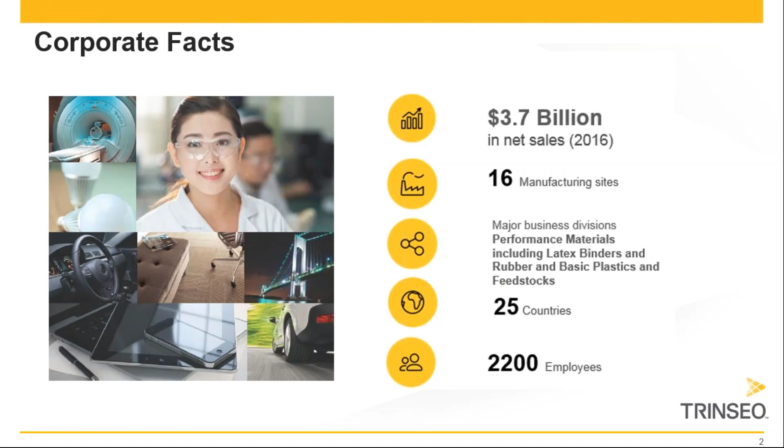We produce different plastics, which I'll discuss briefly on the following slide. We have 16 manufacturing sites, we are in 25 countries, and we have 2,200 employees.

Next slide, please. We are vertically integrated with some of the feedstocks that we use to produce our plastics. And we are also a compounder that provides custom solutions to meet specific customer requirements.

Today, as I mentioned, we're going to talk about ABS, a material Trinseo has been producing for over four decades now. We use a proprietary technology for our ABS, which is a continuous polymerization process. We produce ABS in the US, Europe, and China. China is our newest location, where we began production during the second half of last year.

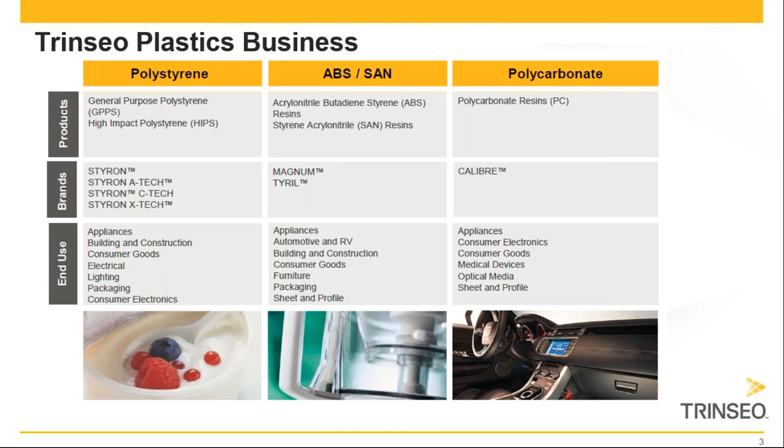Next slide. I want to move into the main part of our presentation and introduce our presenter, Mark Vreys. Mark is our resident expert on ABS resins, and he's based in Terneuzen, Holland.

Today, he's going to share the two methods of producing ABS, the more common emulsion method and the alternative mass polymerization process, comparing the two and discussing the benefits and applications of each. ABS, as you might know, is a very versatile material found in a variety of applications, including the furniture industry, the transportation industry, recreational vehicles, health and fitness equipment, kitchen and bath, and signage.

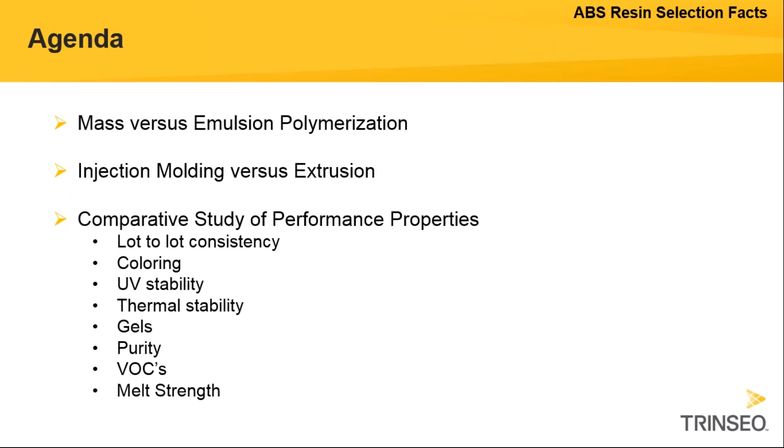So let's first start with the polymerization process, and I'll first highlight the proprietary mass polymerization process of Trinseo, which is also named the solution polymerization process. In this process, we start with a mixture of polybutadiene rubber, styrene monomer, and acrylonitrile, which are all brought together and mixed into a solvent.

The final step is then the removal of the residual monomers and the solvent in the so-called devolatilizer. Then we move the ABS polymer stream into the finishing section, the pelletizer, resulting in Magnum ABS granules. Magnum is Trinseo's brand for mass ABS.

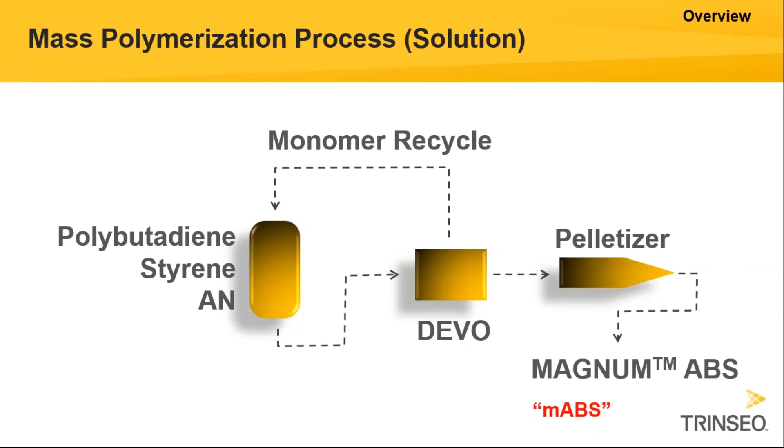So a broader portfolio of products is possible, but it typically has a lower purity due to the presence of the emulsifiers.

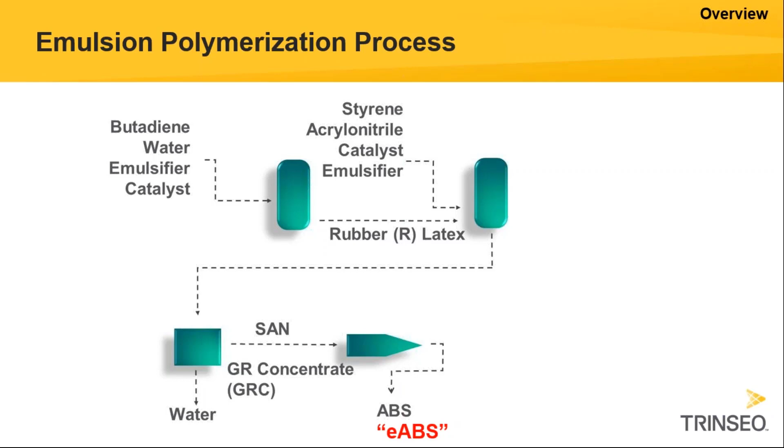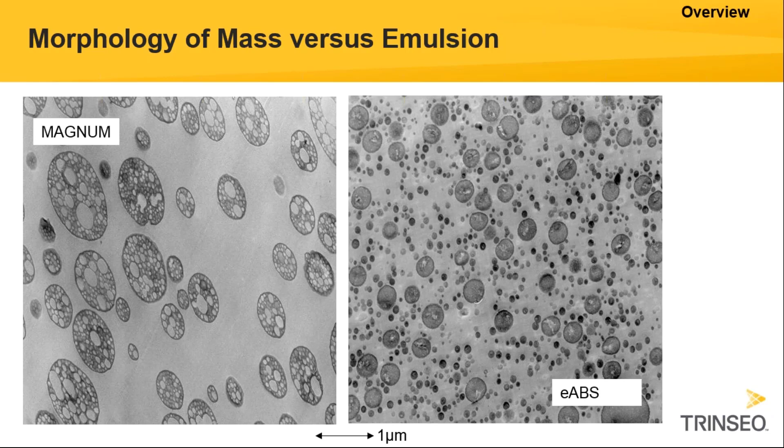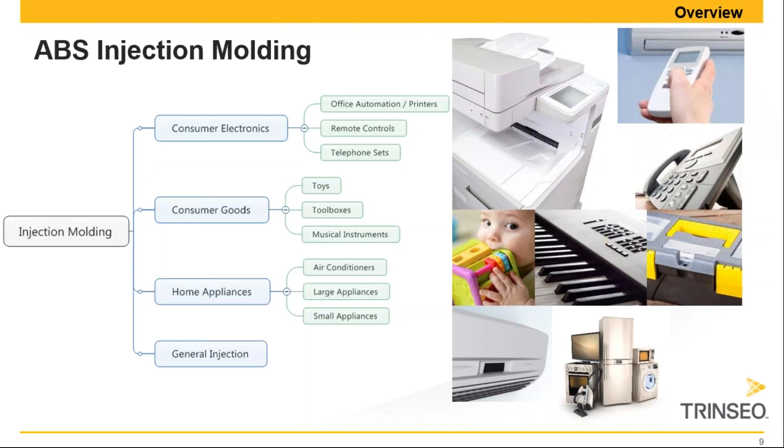Injection molding is all about many colors. So a high lot-to-lot consistency, an easy and efficient self-coloring, are clearly wanted attributes, as of course is also high gloss and good gloss retention after UV exposure, and addition color stability after UV exposure.

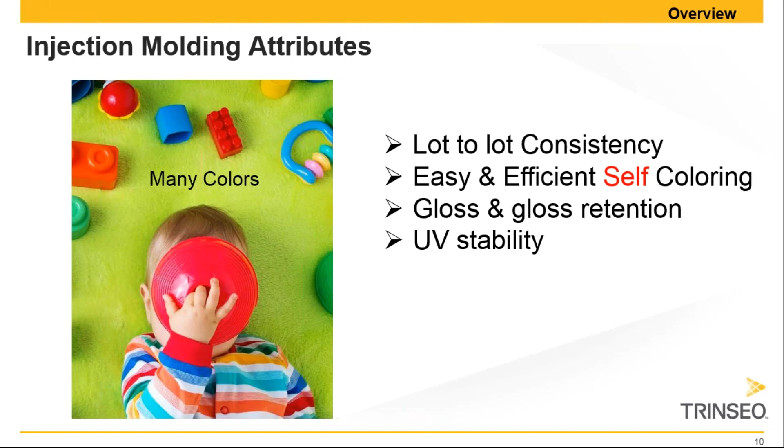Second process is ABS extrusion. Let's have a quick look on the applications here. Now, in ABS extrusion, you have two segments. You have sheet extrusions and you have edge bands and profiles. And the main difference is basically the width. Sheets are wide, edge bands and profiles, those are narrow.

And in the sheets, you have several applications downstream. Most of the time we talk about ABS PMMA co-extruded films for furniture applications, or ABS PMMA co-extruded sheets for vehicle exterior, like the tractor example, the engine hood, the rooftop, the wheel arches. In transportation, interior panels can be made from ABS extruded sheet. Automotive interior parts, we see here also roof boxes for automotive.

Of course, ABS PMMA is very popular in sanitary equipment, also somewhat in the advertisement industry. Travel, we see luggage cases, and also the use for doors, inner doors, and sometimes also outer doors. Edge bands and profiles, they go of course into the edge bands for furniture applications, and we also see profiles in white goods for large appliances.

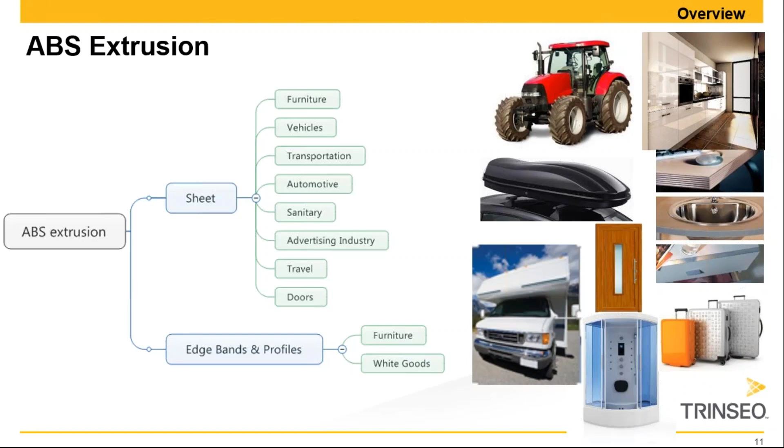Now, before I move into the attributes for ABS extrusion, I want to have a quick word about the channel to market, because there is some extra complexity in the channel to market compared to injection molding.

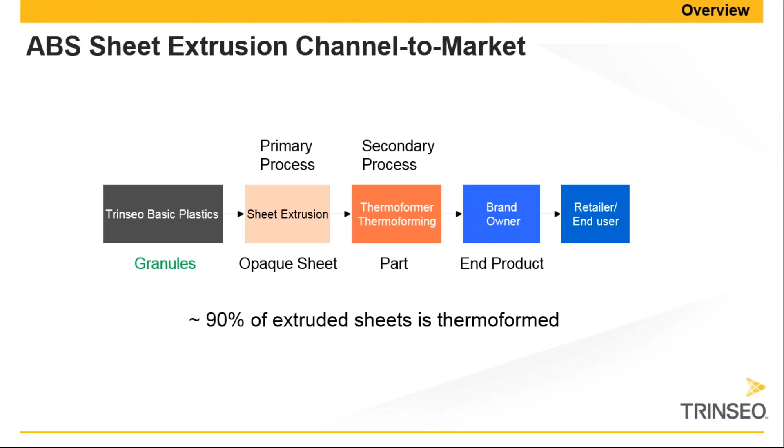About 90% of extruded sheets are being thermoformed. So the primary process in this channel to market is sheet extrusion. The sheet extruder sends the sheets to a thermoformer, where the secondary plastics process happens, and the extruded sheet is formed into a part. The thermoformer sends that part to the brand owner, who assembles it into the end product. From there it goes either directly to the end user or mostly through a retailer to the end users.

If we focus on the primary process first, sheet extrusion, there are many important attributes. Both sheets and edge bands are offered in a very wide range of colors. Hence, easy and efficient self-coloring are important attributes of the ABS. Good lot-to-lot consistency will avoid color dosing corrections, and will enhance productivity and reduce scrap.

In extrusion, there is side trim, and clean scrap is typically reused and reground back into the core layer of the sheet. Therefore, very good thermal stability with retention of color and properties is an important attribute. Good color retention upon UV exposure is relevant as well. ABS resins that are pure and low in volatile organic compounds will avoid unpleasant smell during extrusion, and will reduce odor at consumer level, which is of particular importance for vehicle interiors.

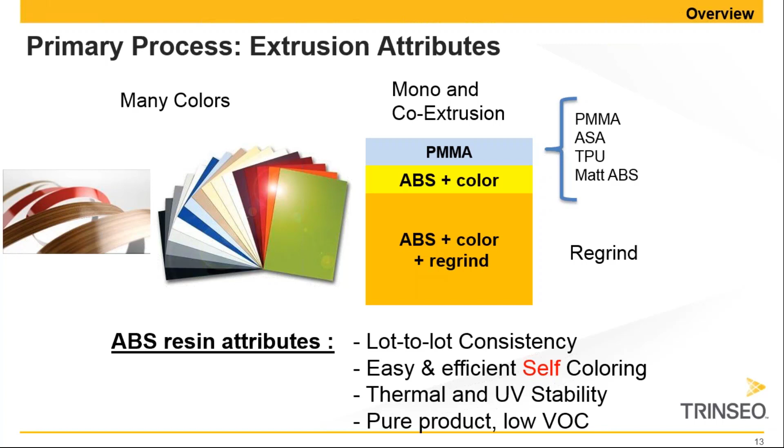If we look now shortly into the secondary process—remember, there is first extrusion and then secondary thermoforming—there are some specific ABS resin attributes that are important for thermoforming.

It's of major importance that the surface quality of thermoformed parts is very nice. There should be a complete absence of surface defects. So it is very important for the ABS that the unmelts, the so-called gels in the ABS resin, are as low as possible.

In thermoforming, we often talk about large, fairly complex parts with a high draw ratio, which may result in wall thinning. A higher molecular weight ABS will offer higher melt strength, and higher melt strength will give better thermoformability and better wall thickness distribution of your final part.

Obviously, like in ABS sheet extrusion, UV stability is relevant, and a pure product with low levels of volatile organic compounds would be beneficial for interior type applications.

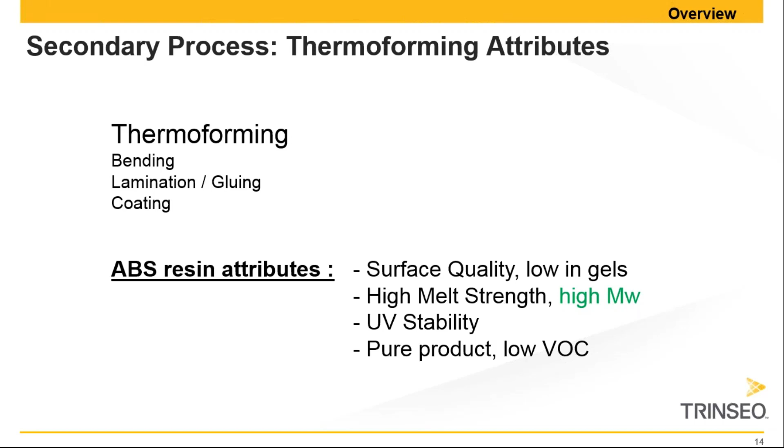Now we will move into the comparative study. Most of the comparative measurements I will show will be the Magnum 3904 directly in comparison with a high impact emulsion ABS of similar impact performance and similar melt flow rate. In the graphs, when I refer to Magnum, I mean Magnum 3904. If I refer to EABS, I mean the high impact emulsion ABS.

Now let's move into the attributes and compare them one by one: the mass ABS process of Trinseo versus the emulsion ABS process.

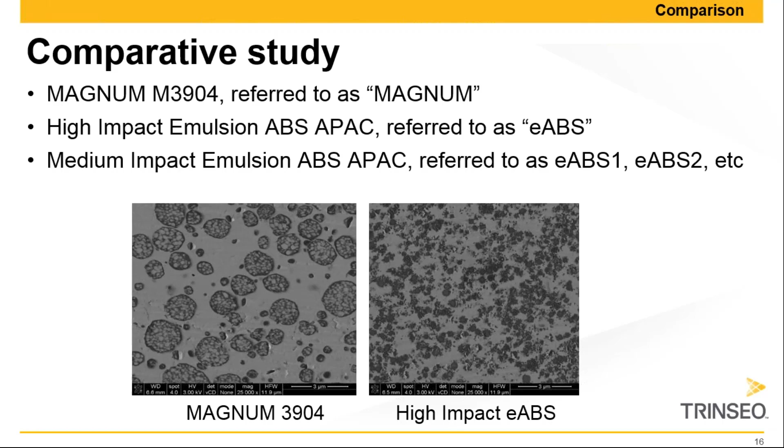First attribute is the lot-to-lot consistency. The run sizes of Trinseo's process are quite big, 400 to 1200 metric tons, typically a factor 10 bigger in run size than typical EABS batch type processes.

This will inherently lead to a very high shipment-to-shipment consistency, as a series of shipments often will originate from the same run. So in between these shipments, a customer will not have to do any color master batch adjustments, and that will reduce his risk for scrap.

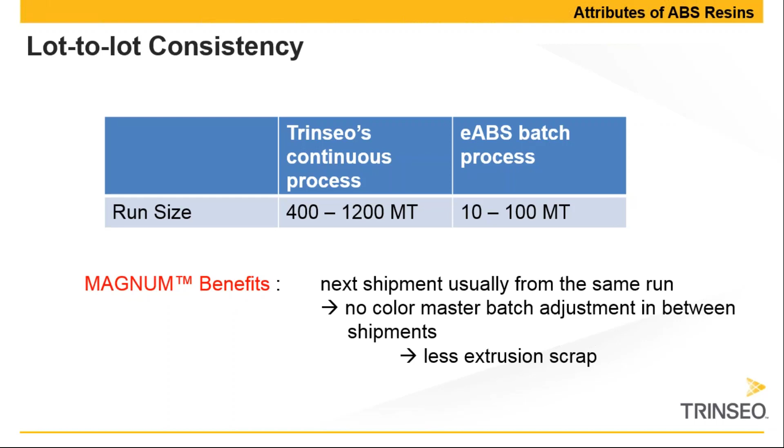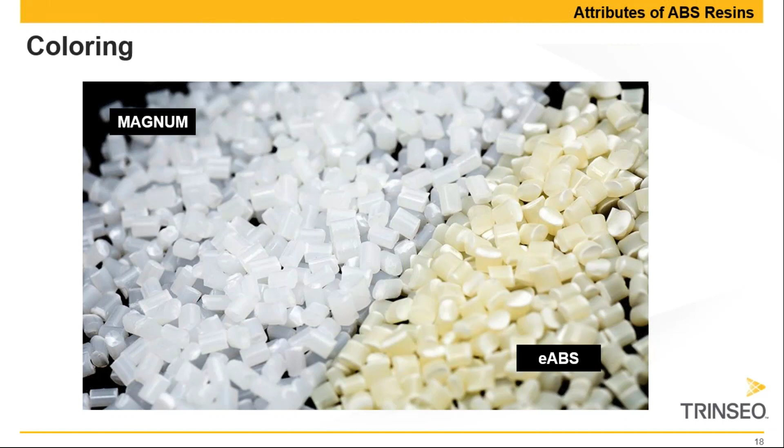Thanks to the lower base color, it is easier for Magnum to color it into lighter colors. On this graph, I represent the color as a B star value on the vertical axis, and the higher the B star value, the more yellow the appearance is.

What we've done here is we added 4% of a white master batch to Magnum and also to the Emulsion ABS, and that white master batch contained 50% titanium dioxide. At the same white master batch dosing levels, you can see that the Emulsion ABS is 2.5 units higher in B star value, so clearly more yellow.

It needs up to a factor 3 more white master batch dosing to bring the Emulsion ABS to the level of Magnum.

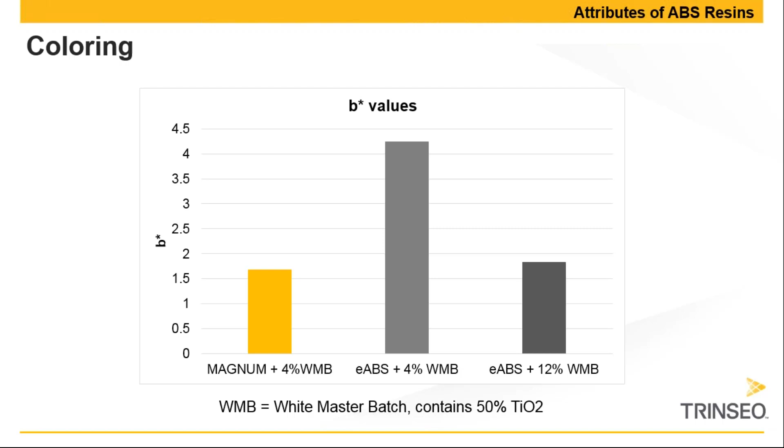This graph shows a similar picture, but now I've added two experiments. We added a fixed amount of optical brightener. With an optical brightener, you can give your sample a brighter and lighter appearance.

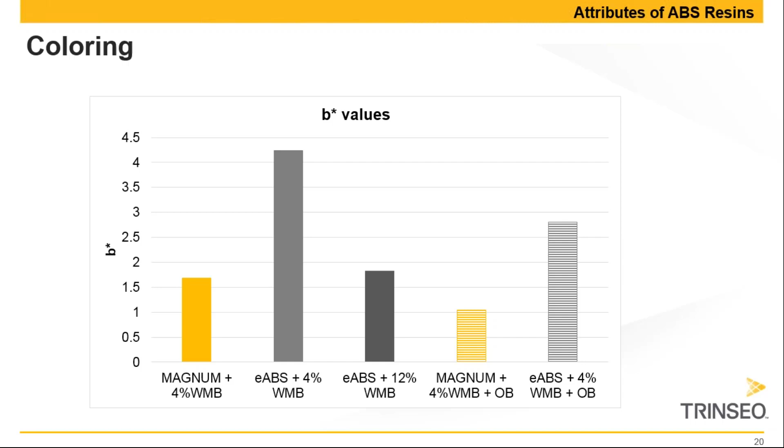But even with adding an optical brightener, the message is the same. It is even so that the Emulsion ABS with 4% master batch with optical brightener still has a higher B star value than the Magnum with 4% master batch without optical brightener.

Now this will have a direct impact on the cost to make final parts. If I assume a cost for titanium dioxide of almost $3 a kilogram, then if I move from 4% master batch to 12% master batch to get to the same final color, Emulsion versus Magnum ABS, we are looking at over $100 extra cost for coloring for the Emulsion ABS.

Now, the extra dollars is not the only disadvantage. There is also some loss in physical properties, as you can see in the second column of the table, where we did some falling dart impact tests, and you see there is a 15% reduction in total energy measurement. So there is some loss in impact due to the addition of extra coloring master batch.

Also, as titanium dioxide is a kind of mineral, your density will go up as well, and it's not negligible. It's about 9%. If you're looking at weight savings, then 9% is for sure not negligible.

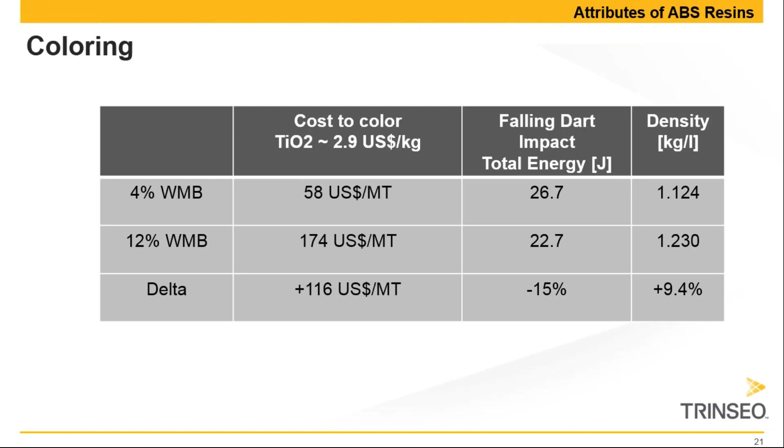There is another risk in using high amounts of master batch, and that is risk for surface defects. The picture on the left side is an electronic microscopy picture of a cross-section of a sheet right through a surface defect. You see this wave at the upper side of the picture.

That is in fact the surface of the sheet, and the surface showed a local deformation due to an inclusion. When we analyze this inclusion with elemental analysis, which you see on the graph on the right side, you see a major peak of titanium, and in the middle and on the left side there is oxygen. So clearly you can say this is very likely a titanium dioxide agglomerate due to the too high usage of pigment dosing.

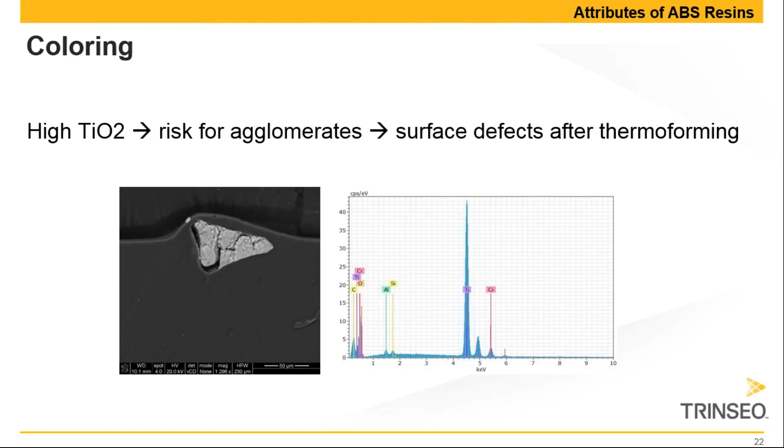Now we move into another attribute for the ABS: we move into UV stability.

This also has some impact on cost. If I take a standard UV absorber for ABS, which is around $30 a kilogram, and about 0.3% level into Magnum ABS is sufficient for indoor applications, then it means a savings cost for Magnum ABS of about $80 a ton for the final part.

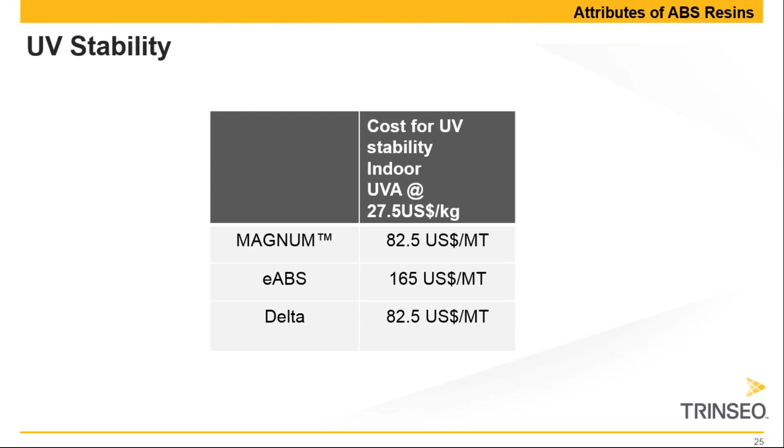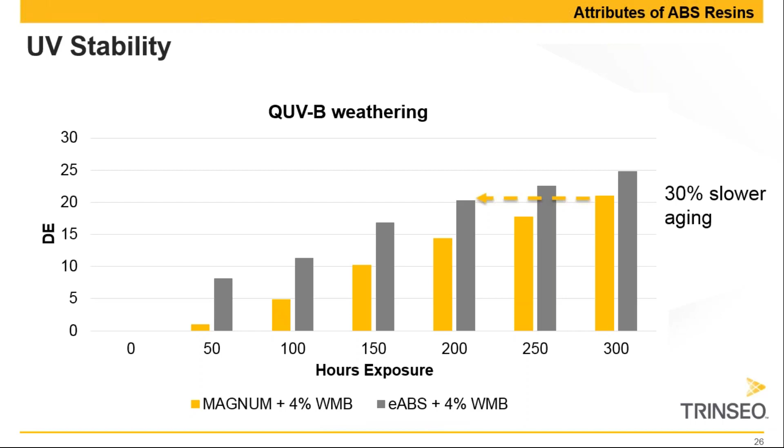Now, for outdoor parts based on extrusion thermoforming applications, it is more cost effective to put the UV absorber into a cap layer, for instance a cap layer of PMMA, or to use ASA as a cap layer to protect the ABS.

Remember, to make the rubber particles visible in electron microscopy, we use a pre-treatment process called the staining process. The staining process acts on the double bonds present in the rubber. Because of UV exposure, these double bonds are gone. The high energy of the UV light starts to cross-link the rubber and destroys and consumes all the double bonds, so the staining process cannot happen anymore. That's why the rubber particles are not visible anymore, but they're still there.

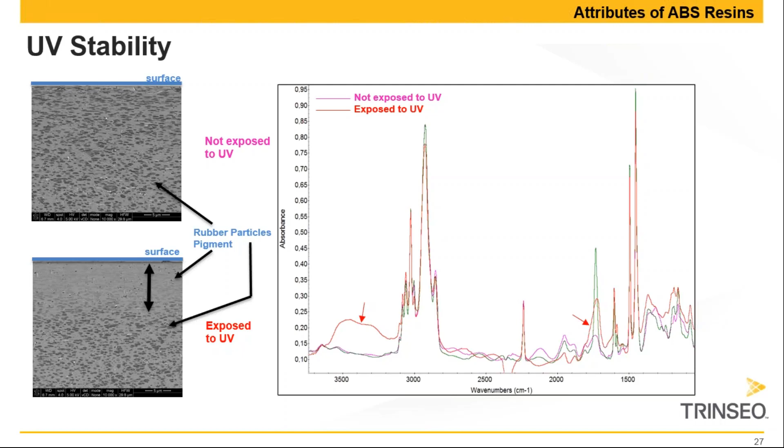Now let's move to the next attribute, and that is thermal stability. Thermal stability is an important attribute for injection molding and extrusion, especially for extrusion, because there are also always significant amounts of regrind that are reused during the extrusion of the sheet.

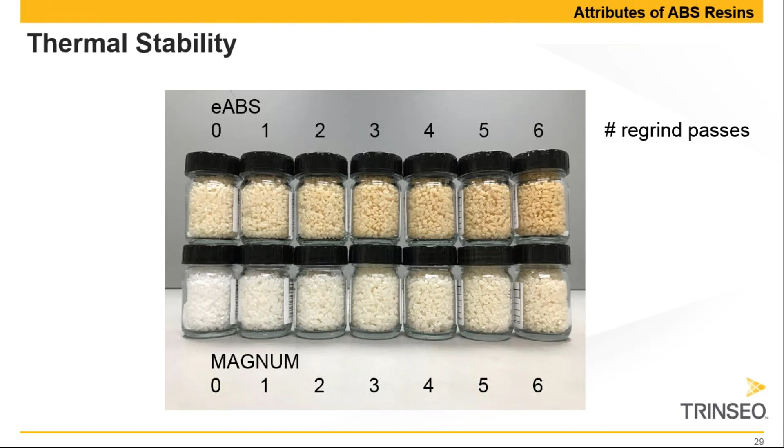Hence, Magnum is more suitable for high regrind loadings or higher regrind loadings compared to emulsion ABS, which will require more color corrections and of course then more cost for pigment.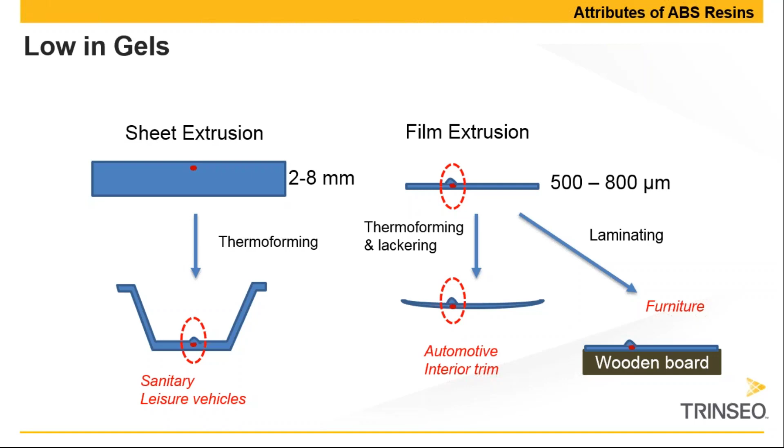We have the very small ones, the small ones, the medium ones, and the large ones. For each of these categories, the software computes the number of gels that we have per square meter of film, which we then can calculate back per kilo of resin. Obviously, the medium size and large size gel categories are the most critical for extrusion thermoforming applications.

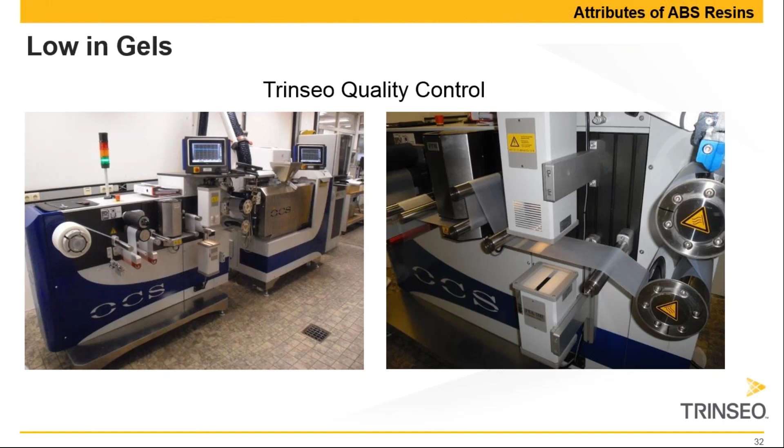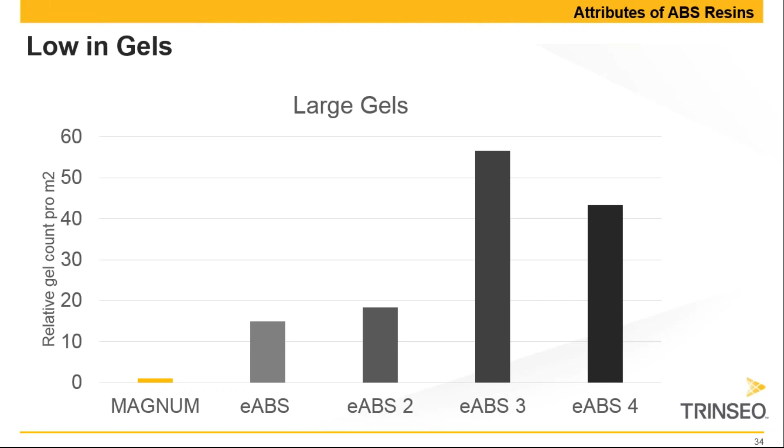Now, a DSC experiment is not a fine experiment, it's pretty brutal. So you would need already close to 1% of an impurity before it would be visible in a DSC. So in this case, we can roughly say there is 3% of non-ABS product in this emulsion ABS. And you would prefer your ABS as pure as possible.

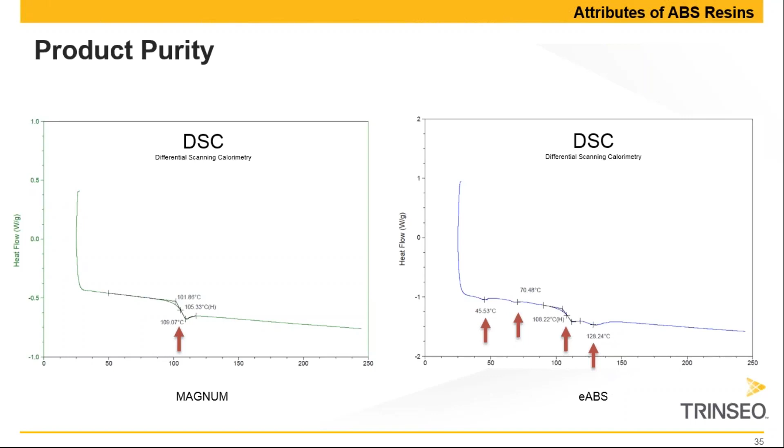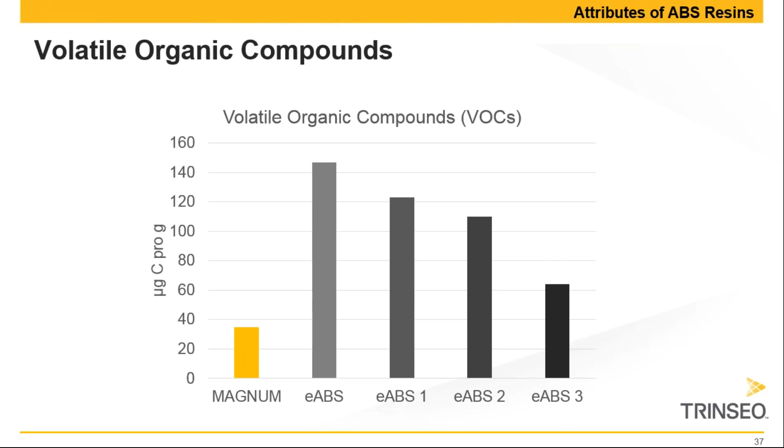We start from a rectangular test specimen that we heat to a temperature of 155 degrees, and then we pull this test specimen with a force at a fixed rate. We continue pulling, and at a certain moment the specimen will start to show necking, and finally it will break. The force at which it breaks, we call the melt strength.

There it's first blown or sucked into the bubble prior to the actual vacuum forming step. And when the sheet is blown or sucked into the bubble, it is obvious that necking will happen in the wall of the bubble, and the necking in the side wall, the circular side wall of the bubble, will be higher than on the top or the back of the bubble.

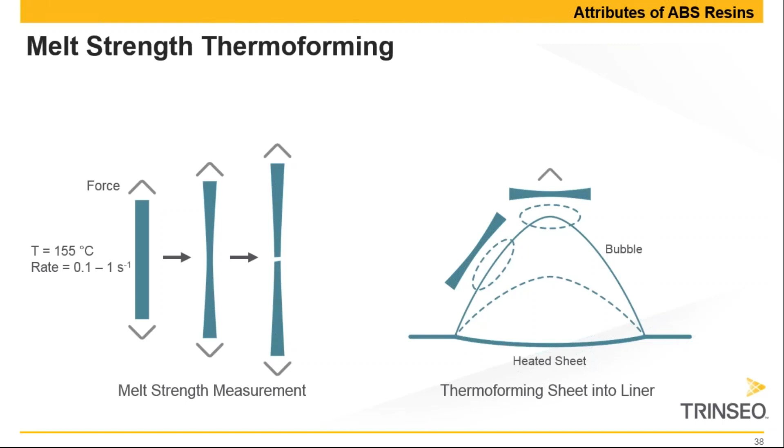Now, the higher the melt strength is, the more resistance you will have against the necking. The less necking that you have, the better the wall thickness distribution over the entire part of the thermoformed part will be.

Now, melt strength is directly related to molecular weight. And Magnum shows about 20 to 30% higher molecular weight than the various emulsion ABSs from Asia Pacific that we have tested. There is a second element that plays a role in melt strength, and that is purity.

If you have 2% or 3% of non-ABS impurities, they will not contribute to the melt strength. On the contrary, they will reduce the melt strength. They are just sitting there as a kind of plasticizer for the polymer matrix. So high molecular weight and higher purity are both beneficial for melt strength, and melt strength is beneficial for a homogeneous wall thickness distribution after thermoforming.

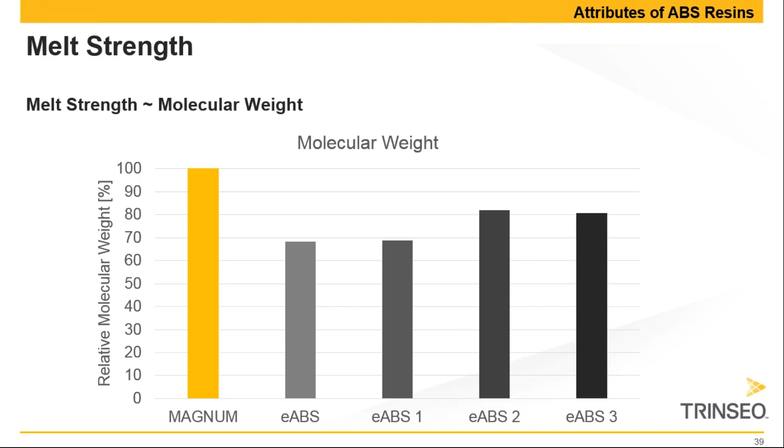This brings me to the conclusion slide, where I would like to highlight the advantages of the mass polymerization process. In the attributes, we see high lot-to-lot consistency, which would benefit in less scrap. The mass polymerization shows a low base color and very efficient coloring. For very light colors, we can assume cost benefits of roughly $100 a ton on the final part.

There is an improved UV stability because of the higher rubber efficiency, so there is less cost of UV absorber. We have seen examples of up to $80 per metric ton on the final part.

The better thermal stability allows for more efficient use of regrind, causes less scrap, less color correction, therefore less costs. We have clearly seen that there are less gels and smaller gels and less larger gels in the mass ABS. That will improve surface quality, especially after thermoforming. It's less of an issue in injection molding applications.

Lower VOCs will give, especially at consumer level, less odor in vehicle car interiors. Mass ABS shows higher melt strength through higher molecular weight and higher purity, and that can result in improved wall thickness after thermoforming.

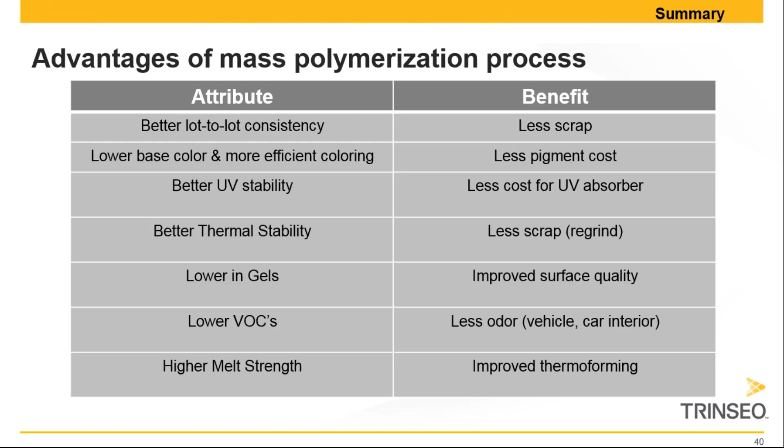So I come here to the end of the presentation, and I open the floor to any questions.

Thanks a lot, Mark. That was great material. We had a number of questions that came in during the presentation. Let me pick the first question: I'm currently using an emulsion ABS, and I'm thinking about trying a mass process. What would I need to do to switch from a processing perspective, and will I experience a visible difference?

Okay, thank you for this question. We have to make a distinguishment between an injection molding application and an extrusion application. So I presume it's here going about an injection molding application.

Obviously, you will have to adapt the level of pigment. You will have to use less pigment, especially if you are working with lighter colors to get your color match. If it's darker colors, there is still a benefit of using less pigment, but it will be less outspoken.

If you have a very high gloss requirement, then it's important to go to the Magnum 8391 because that's the standard grade that we have that can achieve high gloss, because in general the mass ABS process results in somewhat larger rubber particles versus the emulsion process.